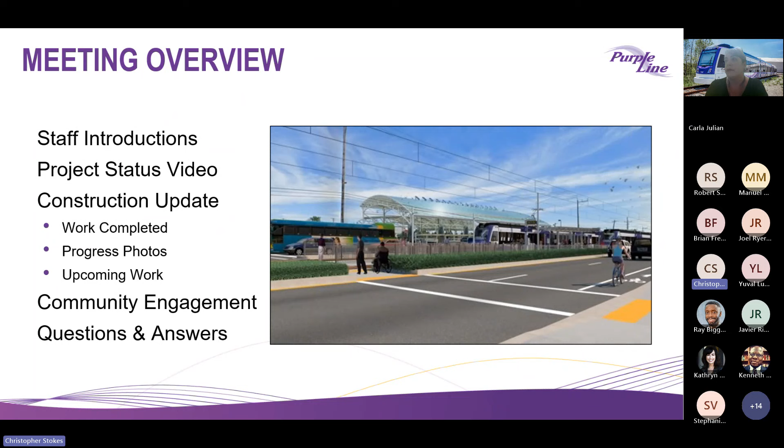Tonight, you're going to hear from Ray Biggs II, our Senior Project Director with MTA, Doran Basso, our CEO at PLTP, Hugo Fonturage, our project executive with MTS, myself, Carla Julian, our construction manager for this area, Manuel Marino, and Seren Sarkisson, our design build systems manager.

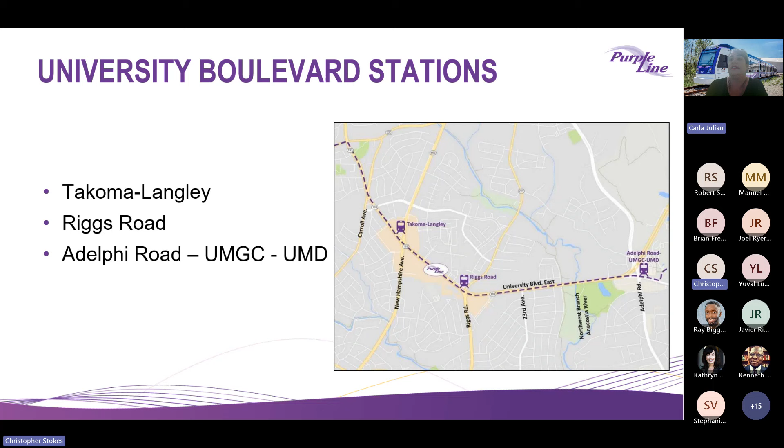The stations that we're going to touch on tonight are Takoma-Langley, Riggs Road, Adelphi Road, UMGC, and UMD. And with that, I'm going to turn it over to Ray to introduce our fall progress video.

Thank you, Carla and Stephanie. We're so glad that y'all were able to join us tonight. Thank you again. It was a busy summer for us here at the Purple Line. So let's check out the progress that we had over the summer, highlighting all the momentum we had over the summer. Chris, let's go ahead and play the video.

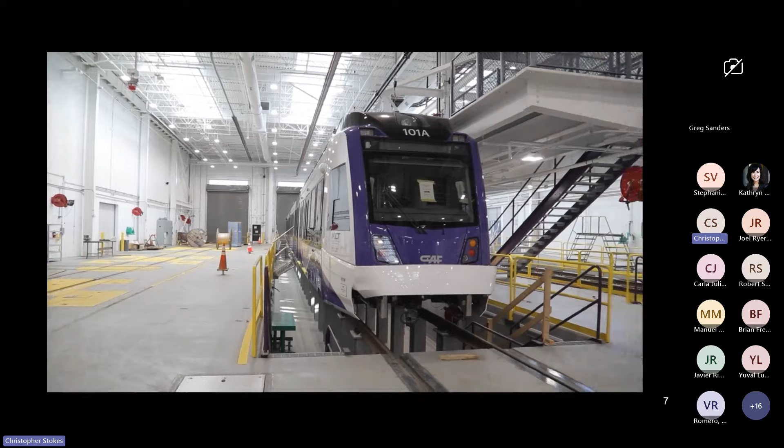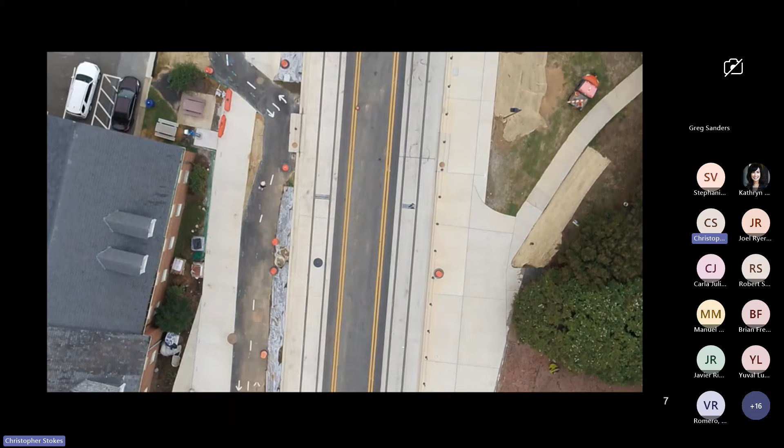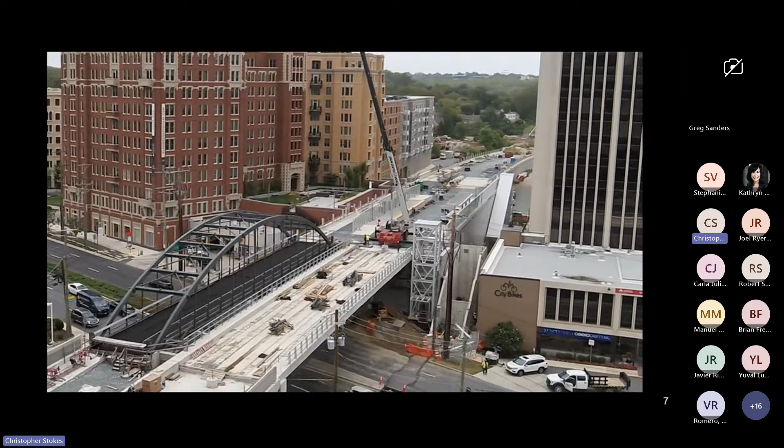Welcome to our Fall Progress Update video for 2024. We are here on Campus Drive at the University of Maryland, where we recently completed a lot of our summer construction work that completed the track installation all along Campus Drive. We have 5 light rail vehicles at our operations and maintenance facility, and we also completed 10 miles of track across the alignment. We also have over 17 miles of sidewalk that have been installed. Additionally, you can see the colorful canopies right behind me, and we have 19 stations that will be in construction by the end of this year. We are excited that we are moving forward, completing the momentum on the project, and continuing that going forward.

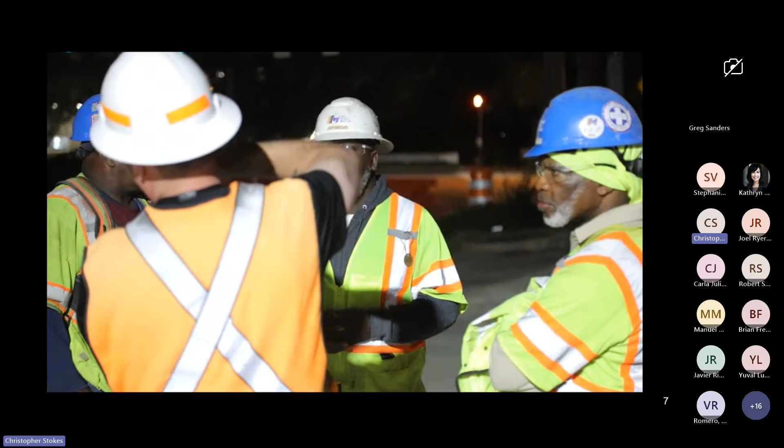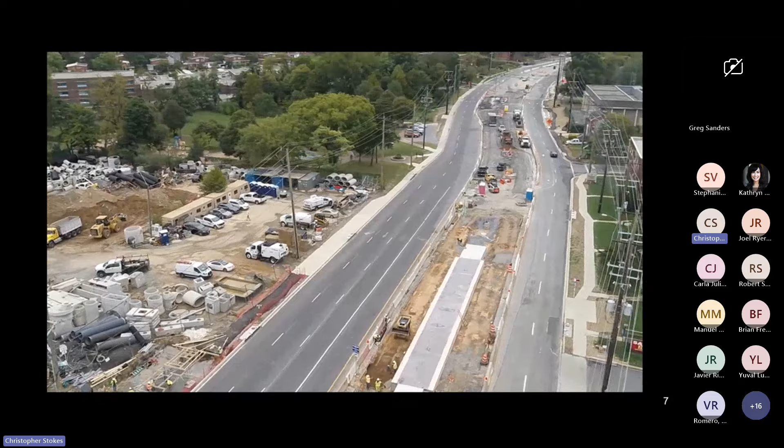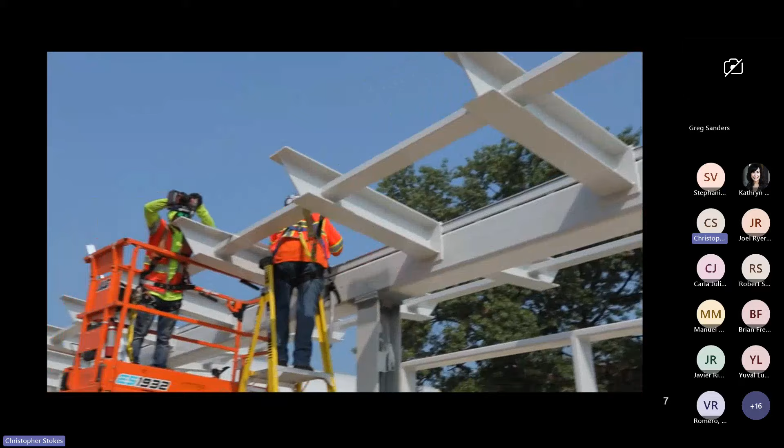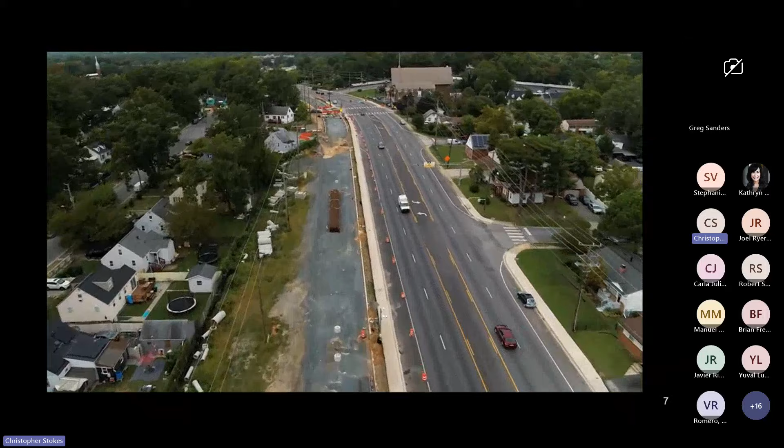Crews have focused on many specific areas to minimize impacts and advance the project. In Prince George's County, crews prepare for track placement by establishing work zones in the center of University Boulevard. Traffic is shifted to the newly completed sections on either side of the road. At the University of Maryland, crews have successfully completed much of the heavy construction through the center of campus. This year, students arrived to find newly completed sidewalks, embedded tracks, paved roadways, and all lanes open on Campus Drive. Also in Prince George's County, crews opened 2 new roads, 64th Avenue and Mustang Drive. Both connect communities to Riverdale Road at signalized intersections. The flyover bridge from Kenilworth Avenue over East-West Highway has also been completed.

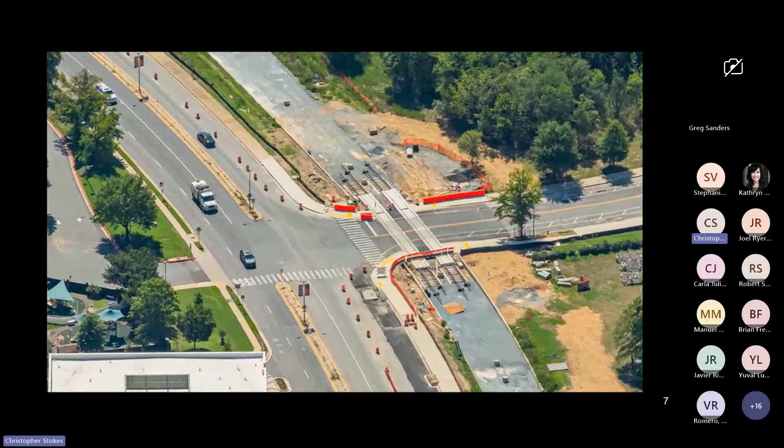Track crews completed the crossing of River Tech Court and opened the road 3 weeks ahead of schedule. At the operations and maintenance facility, the new light rail vehicles are being prepared for testing. I am honored and thrilled to stand here today at our operations and maintenance facility in front of this. Maryland, we have a train.

Good morning. I'm Holly Arnold, administrator of the MTA, and I am so thrilled to be here today to celebrate the arrival of the first of the Purple Line light rail vehicles. I want to give huge congratulations to the Purple Line team. This team does not sleep. They are working all the time to deliver the Purple Line for Maryland, and I'm so thankful and grateful for them. These vehicles are 142 feet long. That's nearly half of a football field, almost twice the size of a metro vehicle, and will be the longest light rail in North America. It'll hold up to 430 passengers.

There will be 8 bike racks on board, as well as 8 dedicated wheelchair spaces accessible near the doors. These electric-powered LRVs will reduce energy and carbon emissions, as well as being quieter than other modes of transportation.

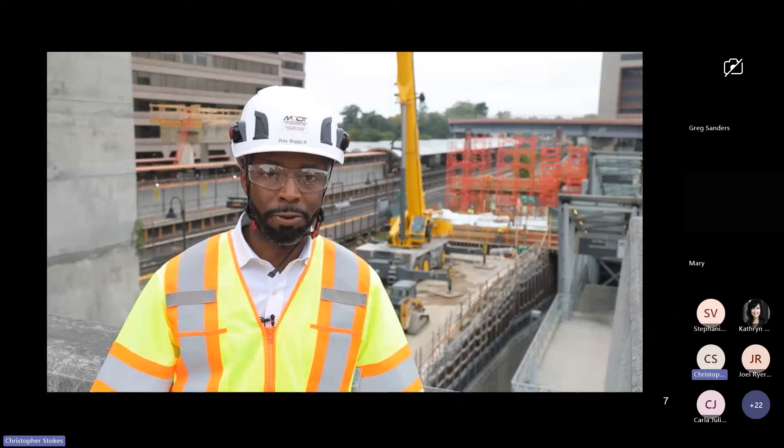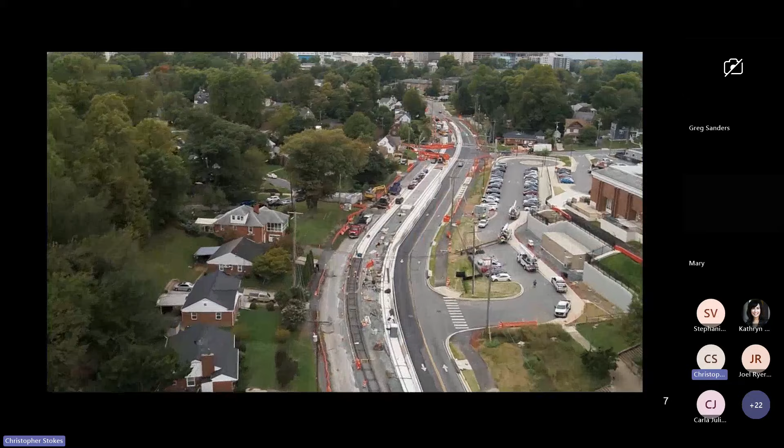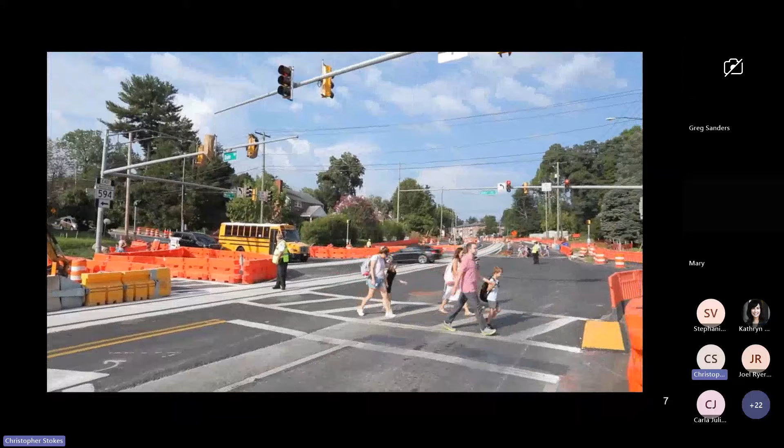Over the summer, we worked very closely with our partners at CSX, WMATA, Montgomery County Parks, and Montgomery County Schools to complete a lot of construction work and installing track all across the alignment. In Montgomery County, the Purple Line has successfully placed both sets of tracks across the Wayne Avenue and Dale Drive intersection prior to the start of the school year. They have also installed the complex curved track at Piney Branch Road and University Boulevard, and fully opened the Talbot Avenue Bridge.

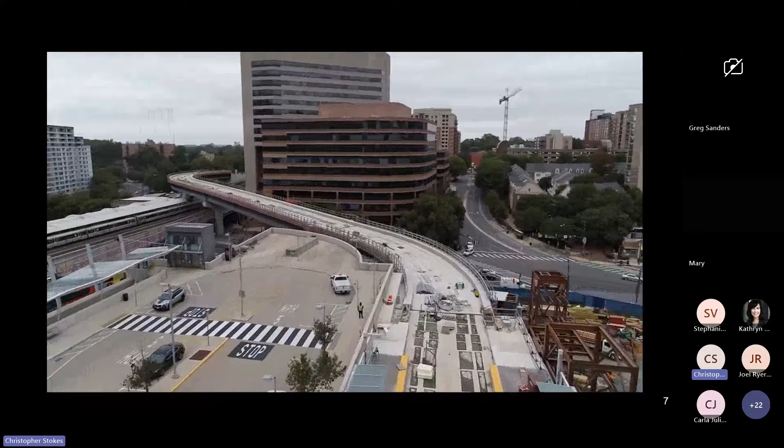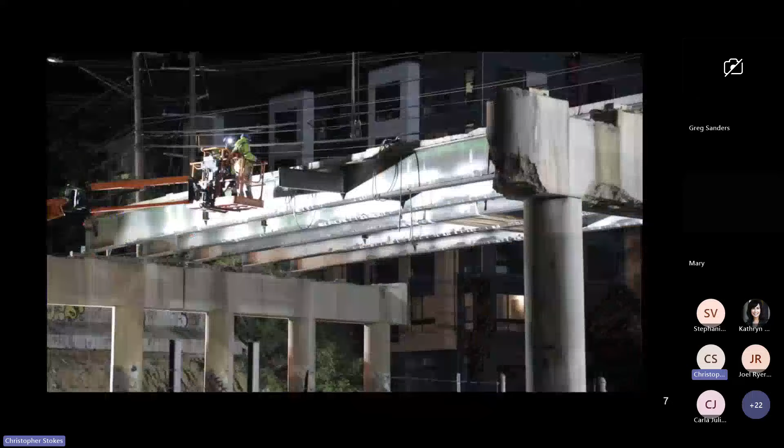At the Silver Spring Transit Center, the LRV bridge over Colesville Road and the foundations and superstructure for the new mezzanine are taking shape. Crews also started the work to build a new and improved Spring Street Bridge by completing the bridge demolition during the WMATA summer shutdown.

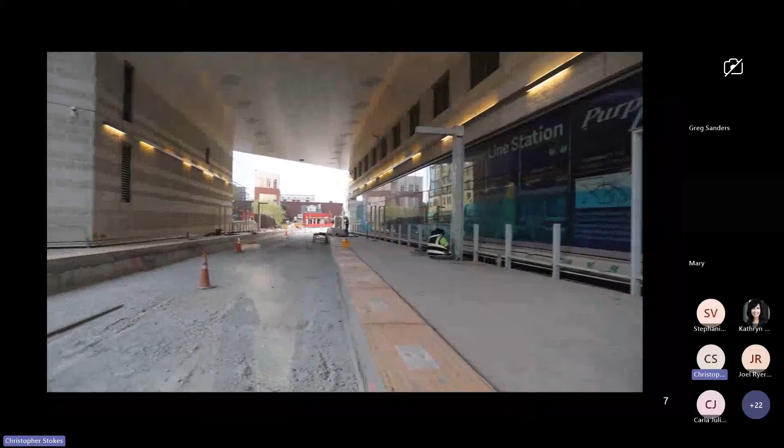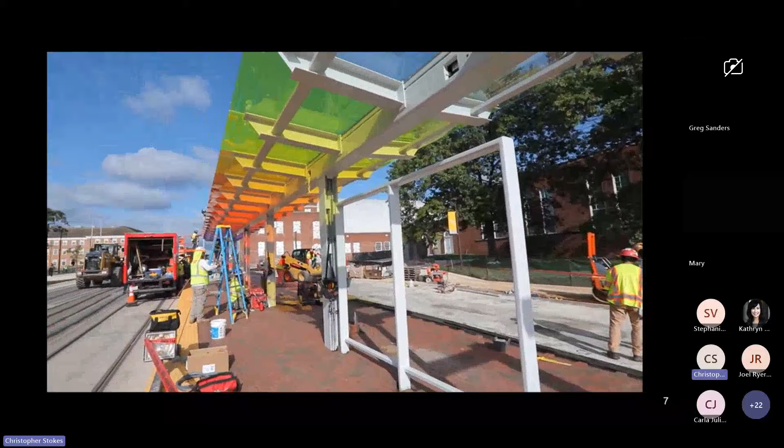Station construction can be seen across the whole alignment, with station after station taking shape. The highlight of the station construction is the installation of the first Art in Transit artwork element at the Campus Drive UMD station. The artists at Legg Lewis Legg added a beautiful display of color that changes throughout the day and is a shining example of things to come at the Purple Line.

Thank you again for your patience, and while we continue construction, we are going to keep the momentum up across the alignment, moving from laying track into the testing phase of the light rail vehicles across the alignment. We are so excited about the Purple Line, and we know you are too. Thank you.

In that area, we are scheduled to begin our testing later this year, where the LRVs will begin to go up and down Veterans Parkway, testing and really starting to see movement of the trains on the track.

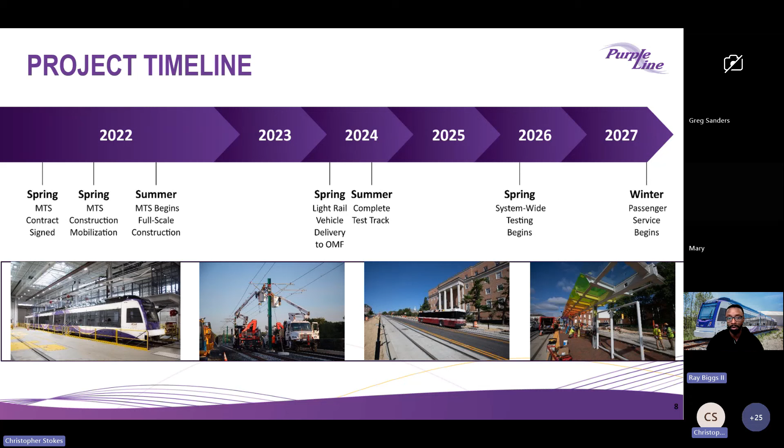Currently, on Piney Branch Road Station, we have completed the station foundation, the platform, and we have just recently installed the canopy just a couple of days ago. We are going to continue the construction around the station with the miscellaneous items from the station itself and electrical items.

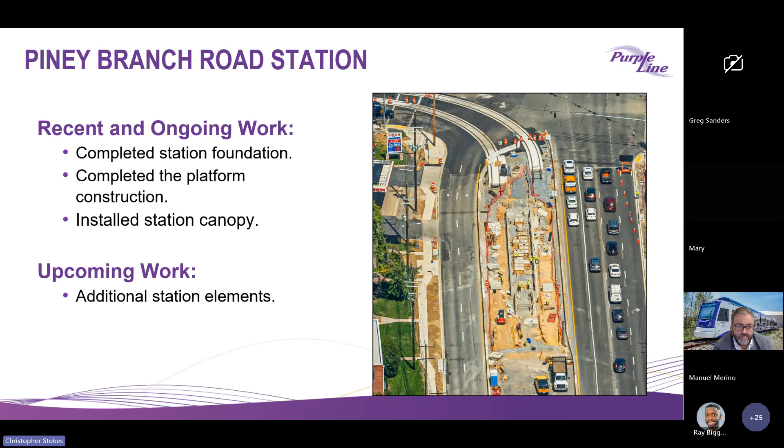Between Piney Branch Road and New Hampshire, there has been a busy month. We have continued the underground utility relocation. Storm drain is almost completed in all that section. We completed all the planter boxes, and we continue the roadway widening and reconstruction at both sides of the road. We have completed the signalized intersections of Piney Branch, West Shopping Center, Takoma-Langley, and Carroll Avenue, and we have also completed the construction of the wall near New Hampshire in front of the Takoma bus transit.

The OCS foundation has already started and has been completed in the area between Piney Branch and Carroll, and will continue in the future until New Hampshire.

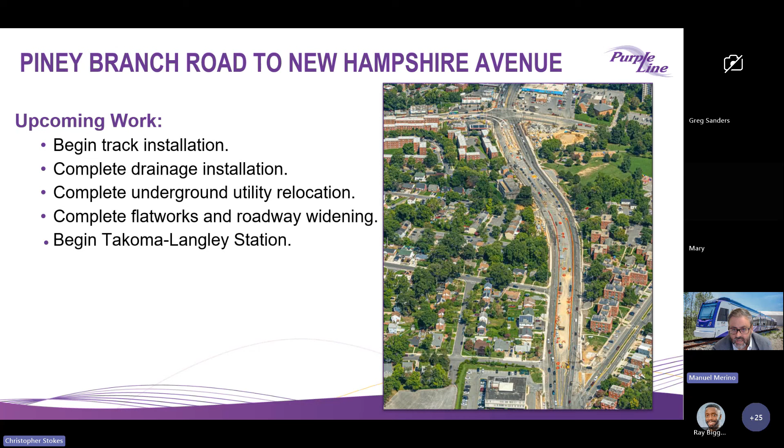On the upcoming work, we are going to start seeing the start of the project. That is the track. Finally, we are able to get into the middle. That is the goal, and the track installation on the ballast is going to start. We are going to complete the drainage, the underground utility relocation, the flatwork, and we aim to start the last of the station on this area of University Boulevard, that is Takoma-Langley.

Seek Lane pedestrian crossing. We completed the installation of the new traffic signal that will allow a new pedestrian crossing in this location.

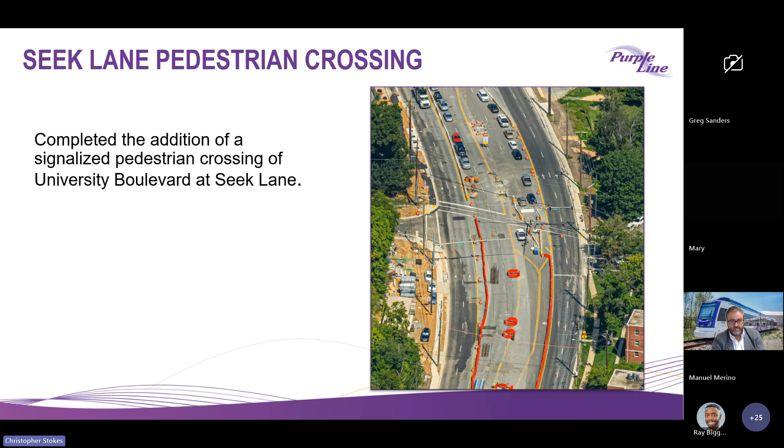The traction power substation that will power all this area in University was installed earlier in the summer in July. Right now, just waiting on the energization.

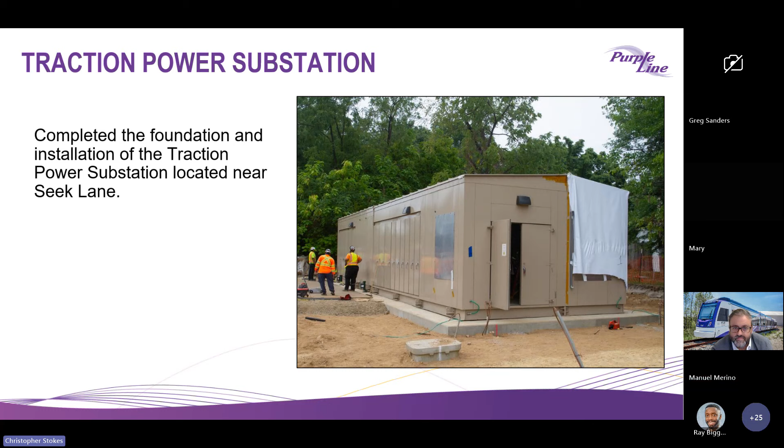On the upcoming work, we are going to have no through traffic in Carroll Avenue for the construction of the track. Currently, we are looking to do it towards the end of December when school is over, and we intend to be there for around 5-6 weeks to do the full construction, a full crossing, and reopen the area after that. Pedestrian access is always going to be maintained on both sides of University Boulevard.

During this no-through traffic in Carroll Avenue, there's going to be different detours provided for traffic in order to get to the other side of the road.

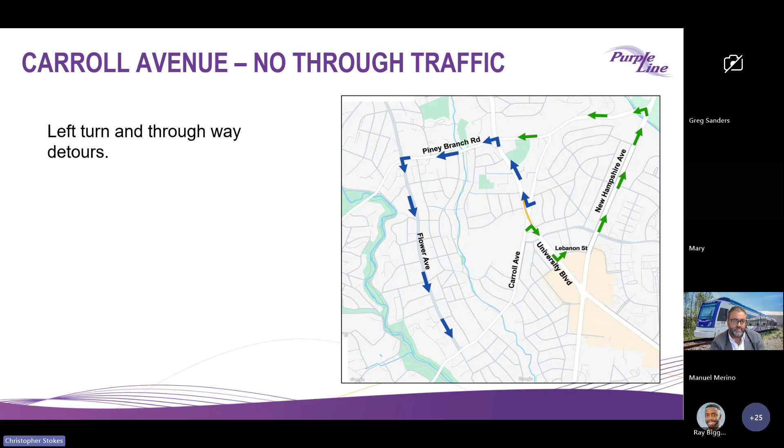The next section between New Hampshire and Riggs Road, the work has also been progressing very well. We completed the overhead utility relocation. We have completed the stormwater drainage installation on the westbound, and we have continued working on the eastbound side on University Boulevard. The planter box installation has also been completed, and we have completed the paving and the curb and sidewalk restoration between New Hampshire Avenue and Riggs Road on the westbound.

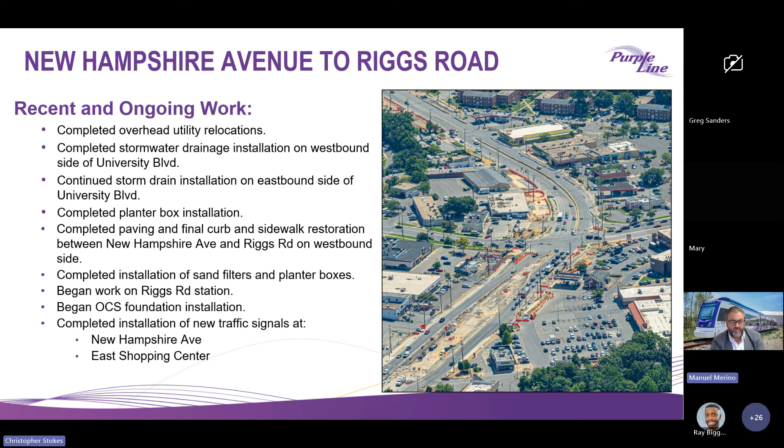On the upcoming work, we are aiming to complete the storm drain installation on the eastbound, complete the curb and sidewalk restoration for the widening, and we are going to complete the Riggs Road Station platform. The duct bank installation already started, and here we are also having the track installation started over the next 6 months. We will be also completing the new traffic signal in Riggs Road.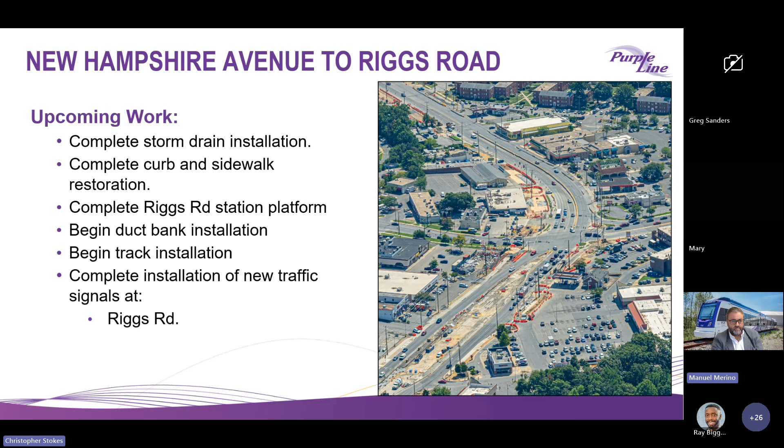Last section is Riggs Road to Adelphi. We have completed almost 100% of the storm drain in this area. At the intersection, the traffic signal has been installed on the 23rd and the 24th, as well as West Park. We have completed all the planter boxes that go alongside, and we have started the track installation in this area.

On the upcoming work, we continue with the restorations on both sides for the curb and sidewalk, overhead utility relocations, OCS foundations for the areas that are remaining, and we continue with the duct bank and the track installation over the next months.

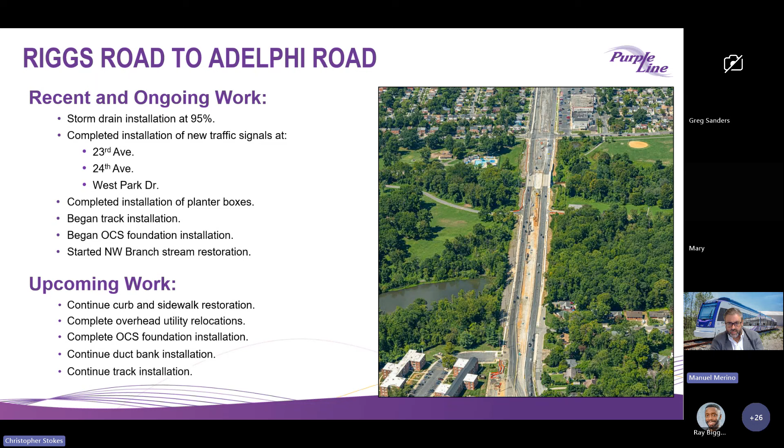This area of University Boulevard and Adelphi, we have recently implemented the next phase of the traffic shifts in Adelphi, where we are halving to the intersection. We are continuing with the installation of the storm drain. We completed the OCS foundation along this area, and we have begun the widening operation on both sides of the road.

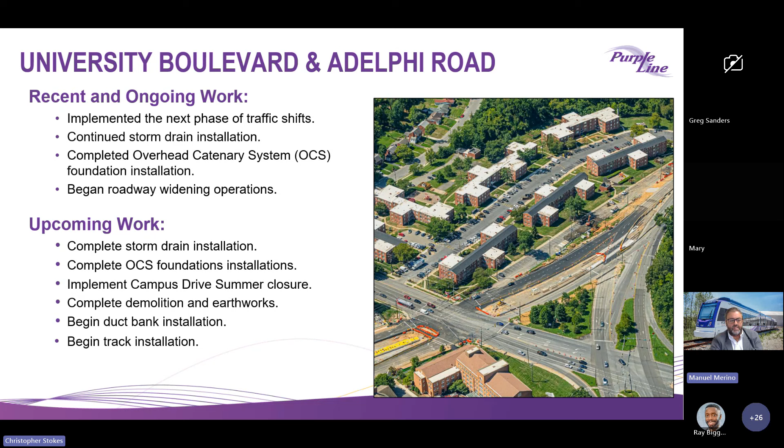On the upcoming work, we'll be completing the storm drain, the remaining OCS foundations, and the Campus Drive, it's already being completed. The complete demolition of earthworks, and we are going to complete the duct bank and the track installation across Adelphi.

On Adelphi Road and Campus Drive, as I mentioned, we are already into the intersection where we are currently building the platform to start receiving the track very soon. What you can see over here will be the next step, phase 2, where we will be switching to do the other side of the intersection, which we aim to have completed before the end of the year.

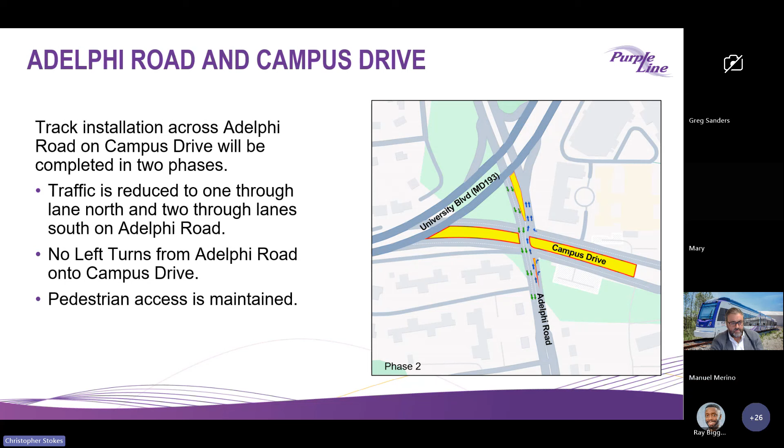Here, Adelphi Road and Campus Drive, you can see that this is a very hot area where motorists should expect delays due to the ongoing construction, and the intersection through the end of the year, January 2025. Traveling outside of rush hour is recommended.

When navigating the UMD area, we are suggesting to choose alternative routes, north-south trips, Kenilworth Avenue or Baltimore Avenue, or for east-west trips, University Boulevard or East-West Highway on 410.

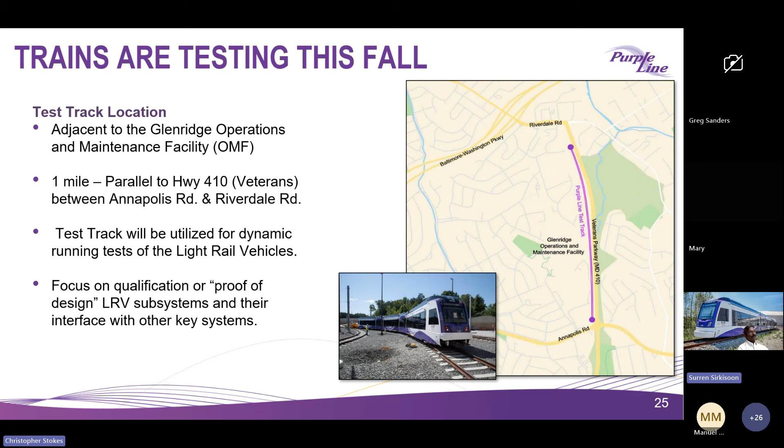Current status of our test track: as I mentioned earlier, we have 5 trains at the site. We've got a couple more coming this month, 8 more planned for the remainder of the year. The track work is completely built, the 2-track system with crossovers, fully tamped. Inspection and testing is wrapping up now on the test track to get it ready for use.

The traction power system that powers the test track through the traction power substation Q7 is installed and tested, cabled, and ready to go. And then the overhead catenary system that feeds power to the trains is fully completed with the poles and brackets and the tension wires and all of the switches and other appurtenances that are needed to get that going. We're in the phase now where we're testing the test track so that it's fully ready to accept trains and accept train movements. And that is the process that we're in right now to get that ready for actual dynamic running of the trains.

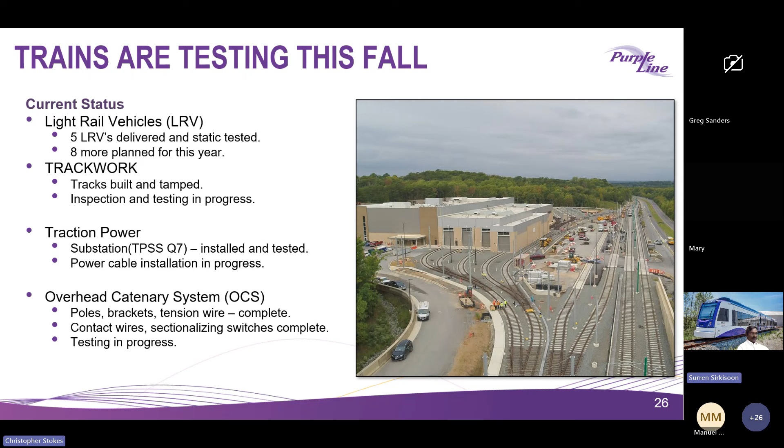So to talk a little bit about some of the activities that will take place on the test track: initially, it'll be testing the trains for braking and propulsion to ensure that they're coming up to speed within the distances that they need to, and they're stopping within the distances that they need to stop. That'll be followed by some safety systems on the trains, the passenger emergency information systems, the CCTV, passenger comfort, HVAC, and signages and so on the trains. Those are all going to be tested while we're running them dynamically on the test track.

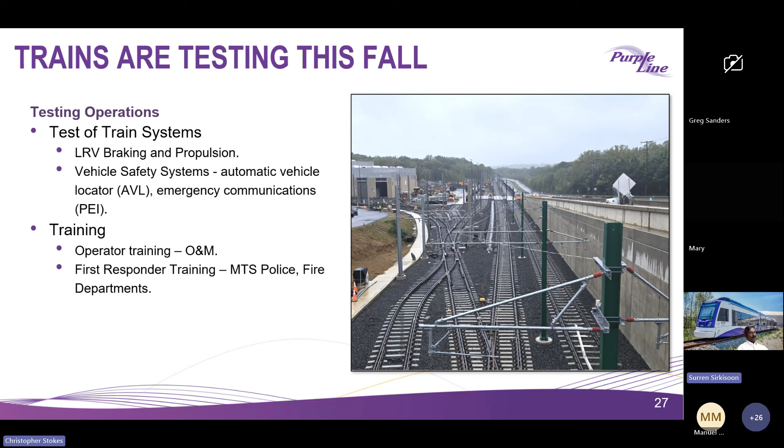We're also going to use that opportunity of testing over the next few months to train more operators. We have train operators that have already been trained. We have first responders, police and fire personnel that have been trained on responding to incidents or emergencies while we utilize the test track. And that training will continue on an as needed basis.

Safety first is our motto, obviously for everything we do on the project, and utilizing the test track is no exception. The test track was built with all safety considerations implemented and in place, and as we start to use it to move trains back and forth, we will be cognizant that the safety procedures have to be followed. Personnel will be trained. We're on a dedicated section of the right-of-way, so there's no public access. We do not cross any vehicular intersections. As I mentioned earlier, we stop short of Annapolis Road and Riverdale on the other side.

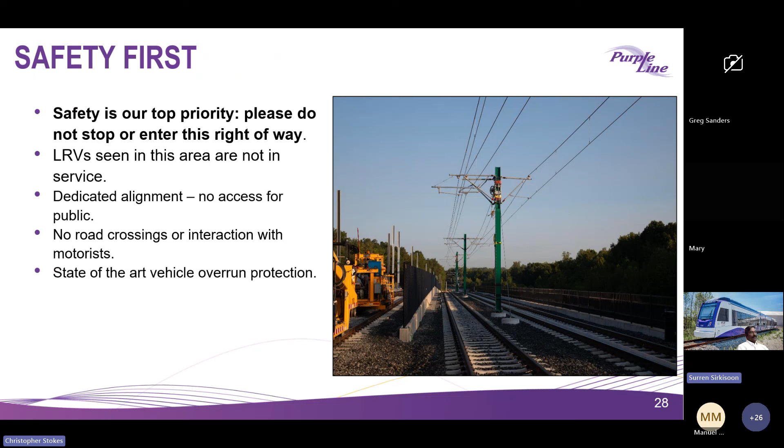We will be using a state-of-the-art stopping device to prevent the trains from overrunning the test track, and daily briefings on activities for train movements and construction activities on the test track while it's in use. And that concludes the quick summary of our test track and our test track activities.

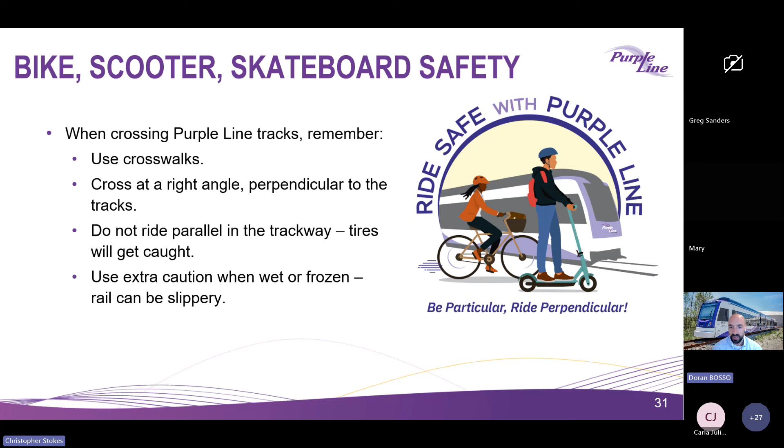From there, we'll move on to PLTP's Beyond the Rails Community Grants Program. This grant program supports local community groups doing such great work already along our alignment. We were really pleased to give out 6 awards over the summer. And tonight, I'd like to call everyone's attention to the next upcoming deadline of November 30th. So you still have a little bit more than a month to submit applications for the next round of grant programs, which will probably be awarded earlier in the new year. Every 6 months, we provide 6 awards in the categories of community and environment. So all the information can be found on our website.

And with that, I will hand it over to Ray to keep talking about the website.

Thank you, Doran. As you can see here, we refreshed our website back in the summer to make it a little bit more user-friendly and to add some information to help out with the public in assessing and learning about the Purple Line and knowing about the construction updates and detours in your area. So I invite you to go to purplelinemd.com and check out the website where we have the interactive map. I saw a question that came in the chat, and I know we're going to get to the questions later, but there are renderings along the map. When you click on the station, it gives you a look at what the stations look like and how the sidewalks are. Additionally, there's a document resource area where you can find some of the layouts of the plans, where it gives you alignment of where the Purple Line will be, along with sidewalks and access and how it connects into existing roads. And all of that is in the document library under resources at the top right when you visit the website.

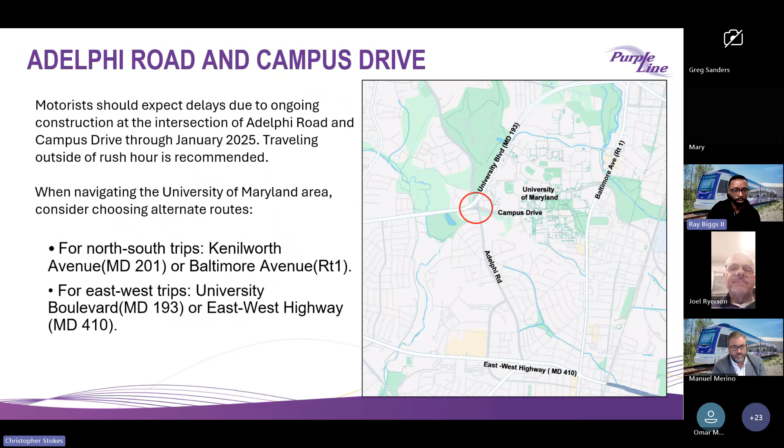So Omar, just to answer the question, the intention of Piney Branch, the only crossing that right now is closed is Barron Street, and we are planning to reopen that by the end of this month. We are trying always not to have several intersections in the vicinity closed at the same time.

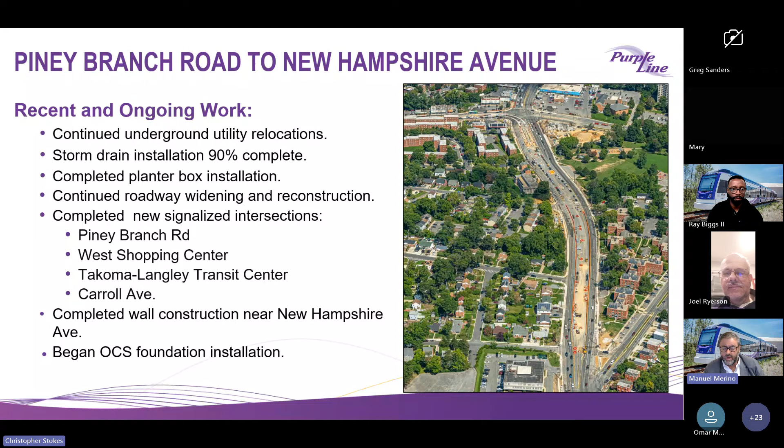In terms of Carroll Avenue, our intention is to close it after the school break. We're doing this because it's going to be way faster, and the interruption will be lesser than the regular crossings. We're also going to take advantage of that school break, so we're aiming to be there 5 to 6 weeks for this crossing.

We have already proven in the summer and in other areas that we have been very effective and fast when doing the crossings. That's why we are always trying to adjust school breaks, spring breaks, and things like that to minimize the impact that you mentioned before.

But just rest assured that Piney Branch, the last crossing, is going to be done and open by the end of this month. So Piney Branch should not have more crossings. We'll have Garland and Barron open after the end of this month.

Yeah, I appreciate that. And not to take up too much time, but also to speak on University and Ann Street as you approach New Hampshire Avenue - I'm the manager for the farmers market there on University and Ann Street. Half of our customers come from the PG side, and I'm also sharing what customers, shoppers, and community members are saying, who are up and down University Boulevard when it comes to the farmers market.

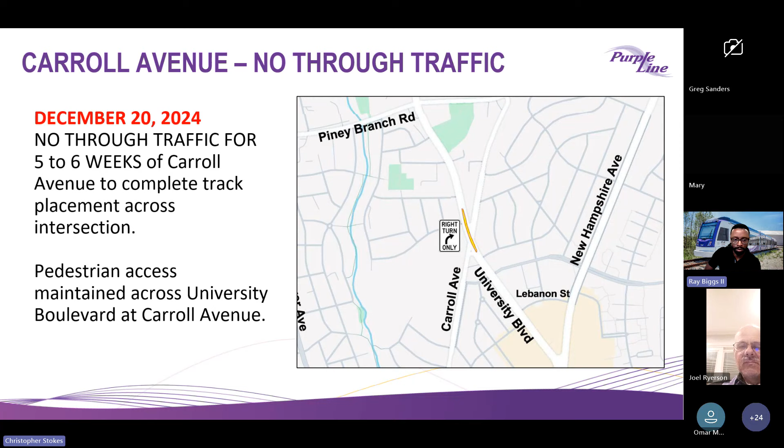Appreciate that, Omar. We'll have the team take a closer look at that. And as always, if you see anything out there, just let us know - send either an email or call us, and we immediately get the team out there to address things that come in through our outreach.

It looks like Javier has a clarification to that discussion too. Just to clarify, when you refer in the presentation to East and West Shopping Center, are you referring to the entrances by Ann Street and the former Rite Aid? I haven't checked, but there was a pedestrian crossing light that was eliminated at Ann and University - is that going to be restored?

Manuel, I don't know if you know the answer to that. Yeah, so the West Shopping Center is the one that is close to Ann Street. So there's going to be 2 crossings, if I don't remember wrong. There's going to be 2 crossings - if you give me a second, I'm going to confirm it.

There's going to be a crossing in front of Lebanon, and then what is called the West Shopping Center, which is the access to the Takoma Center. So within that vicinity, there's going to be 3 crossings: Merrimack, Lebanon, and West Shopping Center, between Carroll and New Hampshire.

Okay, so west and east, that's kind of in the same intersection, just different sides of the street, or Merrimack and what? I'm sorry, I'm just looking at a map right now. Merrimack, Lebanon. Okay. Correct, I see. Okay, thank you.